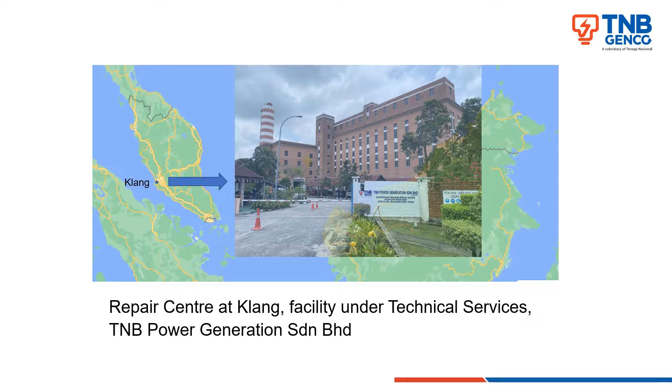Our repair center is located in Klang, a facility under Technical Services TNB Power Generation Sdn Bhd. Repair Center was established in 1994. We had a series of technical transfer agreements with GE in 1994 for refurbishment of GE stationary components, with Turbocare in 2007 for refurbishment of rotating components, and with KC Engineering in 2012 for rebabbit of bearings. At Repair Center, we have about 90 full-time staff and a 100,000 square feet facility.

In terms of general capabilities, we have gas turbine parts repair, bearing re-metalling, pump and gearbox refurbishment, reverse engineering and spare part fabrication, hydro and pump parts repair, and power plant solution provider.

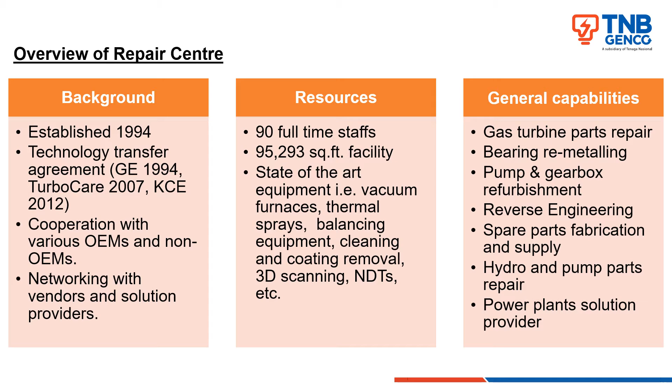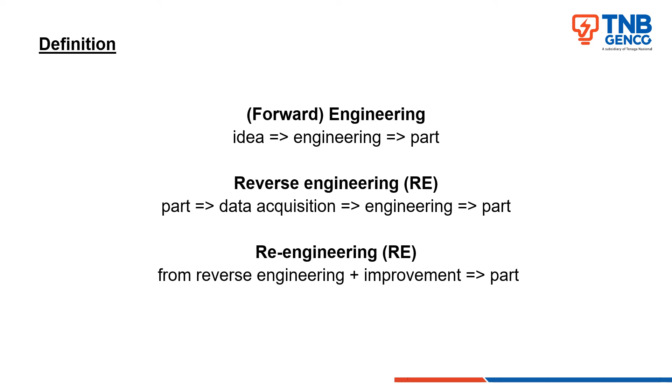Engineering, as we know, started from the idea. Then we do the engineering analysis to come up with the part. Reverse engineering, on the other hand, started with the parts. We do data acquisition and measurement on the part. Then we justify the data using engineering analysis and fabricate a new part. Re-engineering is taking a step further from the reverse engineering by doing some improvement to the part. So by re-engineering, we'll get a part better than the original.

Let's see why people in various industries do reverse engineering and re-engineering. First, there are many equipment that is already obsolete and the OEM no longer exists, but the equipment still works fine. In TNB, we have many such equipment in our older plants such as Cameron Highland. So the first reason for reverse engineering is to replace obsolete parts.

There are also occasions where OEM needs long lead time to deliver parts, but we cannot wait that long because our plant is down. For example, last year we had a broken ID fan in one of our power plants. The OEM could only deliver the replacement part in February 2021. Thus, we had to reverse engineer and fabricate the fan parts to avoid enduring losses of millions of ringgit.

The third reason is to reduce operational costs. While the cost of spare parts is only a few percent of our power generating costs, it's still in hundreds of millions every year. So it only makes sense to save 30 to 50% by doing local fabrication, as long as the part quality is at par with the original parts. For example, a small pump shaft made from low alloy steel will cost around 20,000 ringgit if bought from the OEM, but local fabrication will cost less than 10,000 ringgit.

The fourth reason is to improve the part, normally because the part keeps failing before its service interval and the OEM does not provide satisfactory support. When the part fails before a planned outage, it causes forced outage to the whole plant, and this is very expensive, costing hundreds of thousands of ringgit per day in opportunity loss. We normally improve such parts using better material, better design, or application of hard facing coating to reduce the wear rate of the part.

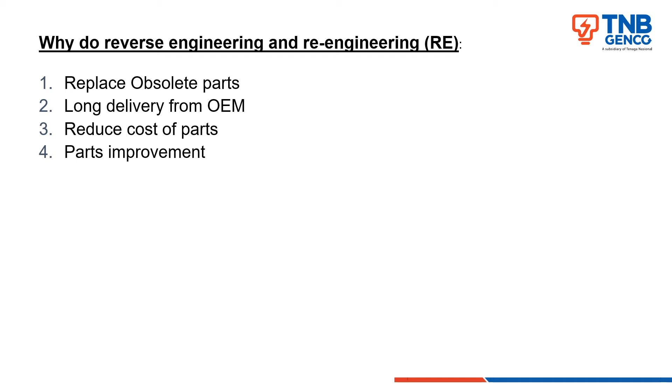Our journey in reverse engineering started about 14 years ago after TNB Remaco signed a technology transfer agreement with Turbocare, a third-party spares provider, in 2007. Unlike technology transfer with an OEM, where the OEM transfers documents and advisors to localize their processes, technology transfer by an independent spares provider is without any handing over of documents. They send an advisor and work with us to develop the processes.

One of the processes is reverse engineering, where we had to scan used or new blades, develop 3D models and drawings, and work with the dimensional data for our refurbishment process. This experience gave us the confidence level necessary to embark beyond gas turbine parts into other power plant parts.

We started with fabrication of burner spools in 2012. This is the first product where we used proper reverse engineering as we use now, which I will explain later. Then we worked on cooling water pump impeller, which required design improvement. This was the first time we had to work with stress analysis software to justify design change.

In 2014, we had the opportunity to carry out reverse engineering on the hot gas casing, a combustor part, which contained a pending patent. So we had to work with an intellectual property lawyer on how it's safe to proceed with the work, and bypass the claims in the patent to ensure that we do not infringe the OEM's patent.

This experience provided us with the knowledge, skill, and most importantly, confidence level to work with external customers. We rode on the decline of world oil price and offered our services to oil and gas industries, which are looking for operational cost optimization.

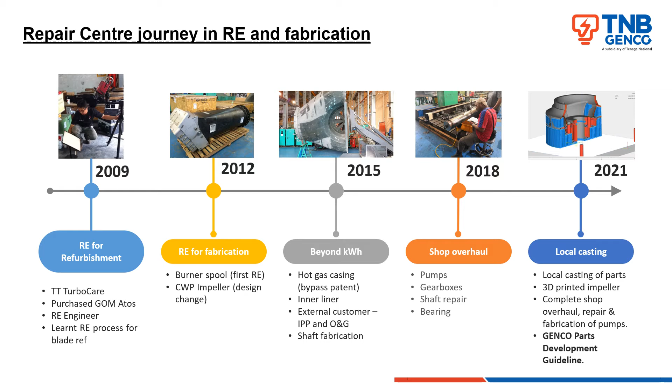This journey provided the repair center with a unique set of skills, and a part development guideline has been approved to be used in TNB Genco in August 2021.

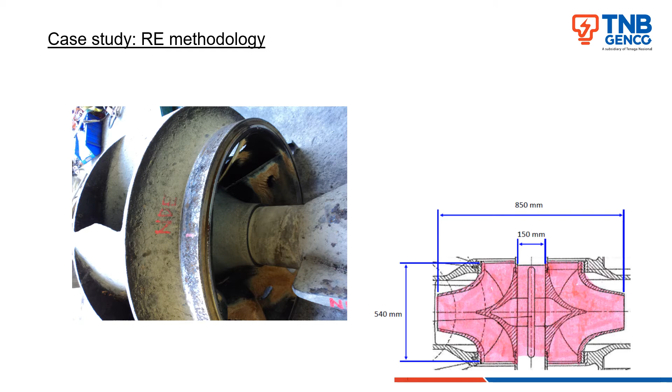This is a freshwater pump impeller. I will use this as a case study to explain reverse engineering methodology. This pump has a cavitation issue due to low suction pressure. I am at no liberty to share the brand of the pump, but I will call it company F.

The part is about 420 kilogram, and the pump comes with a 1386 kilowatt motor and rotates at 740 RPM. The medium is fresh water, and the impeller material is made from ASTM A216 WCB, which is cast steel.

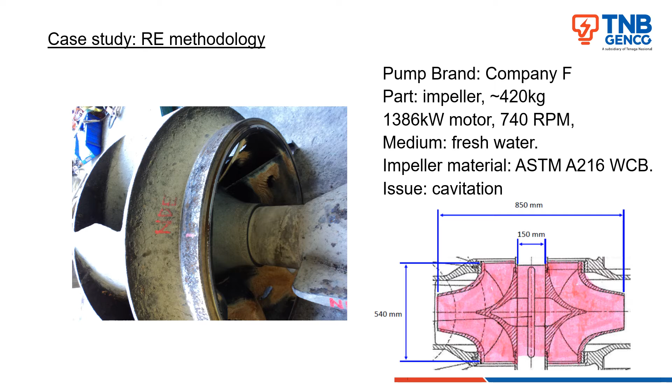In Malaysia, intellectual property is administered by Perbadanan Harta Intelek Malaysia, PHIM. We normally check for trademark, patent, copyright, and industrial design on their website, www.myipo.gov.my. The second step is to do data acquisition, which consists of design intent, material, and dimension.

The third step is to carry out analysis based on the obtained data. We'll identify design standard and material standards to be used, create a 3D model, and if needed, carry out further 3D computational analysis. The output from this step is a 2D manufacturing drawing with tolerance to be used by our fabricator.

The fourth step is fabrication. Prior to the fabrication process, we have to prepare a quality assurance plan that outlines detailed activities, methods, acceptance criteria, and responsibilities of every party in the work.

If there are many parts spread over several fabrication batches, we normally prepare first articles and check the first article thoroughly. Once the first article has been approved, then the production parts can be fabricated. During the fabrication, quality control will be done in accordance with the quality plan. All the quality control check sheets will be compiled as part of the final manufacturing data sheet to be submitted to the end user.

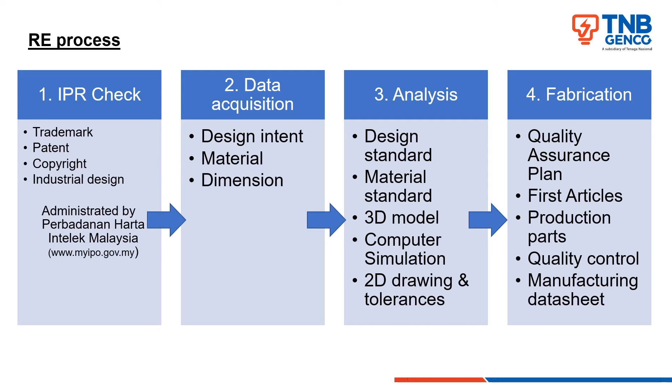Now let's see the definition of intellectual property: trademark, patent, copyright, and industrial design. Trademark is any sign capable of being represented graphically, which is capable of distinguishing goods or services of one undertaking from those of other undertakings.

Trademark is governed by the Trademark Act 2019. It provides 10 years protection and is renewable.

The second is patent. Patent is an exclusive right granted for an invention, which is a product or a process that provides in general a new way of doing something or offers a new technical solution to a problem, to exclude others from making, using, or selling the invention.

The keyword here is to exclude others, because even though the patent is published, it will prevent others from making the same thing. Patent in Malaysia is governed by the Patent Act 1983, and it provides protection for a maximum of 20 years. The third one is copyright.

Copyright is a protection given to authors, copyright owners, and performers of their copyright work and performance as prescribed under the Copyright Act 1987. It provides protection during the lifetime of the creator and 50 years after the death.

The fourth one is industrial design. It features shape, configuration, pattern, or ornaments applied to an article by any industrial process, which, in the finished article, appeal to the eye and are judged by the eye. It's governed by the Industrial Design Act 1996. It provides protection for 5 years, renewable every 5 years up to 25 years.

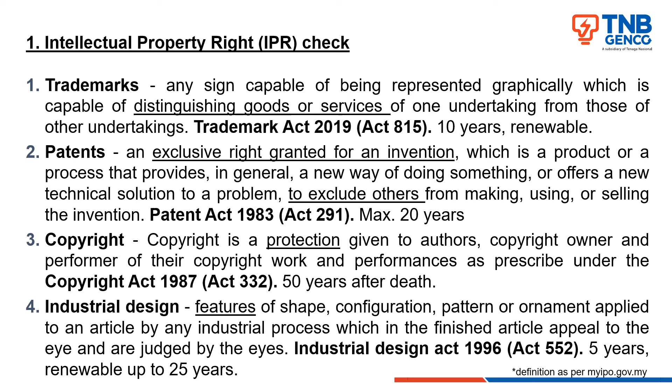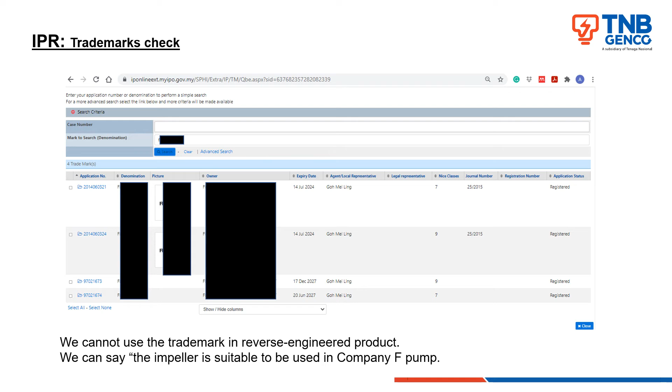Now, let's see how we use the MyIPO website to check for intellectual property. First, we check for trademarks owned by the OEM. From the result, the OEM has trademarked their name and symbol. So in our document or on the part, we cannot use a trademark to misrepresent that the impeller is of the OEM. However, we are normally allowed to say the impeller is suitable to be used for the company F pump.

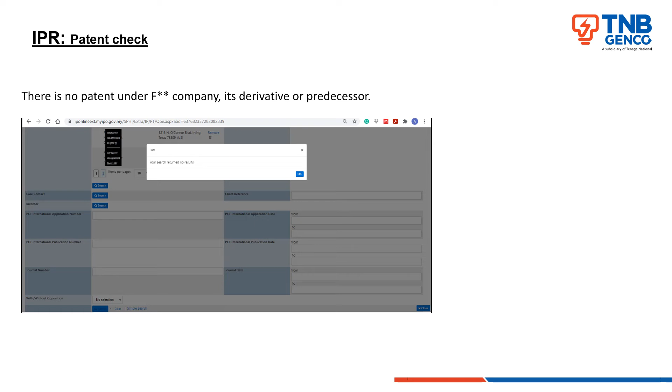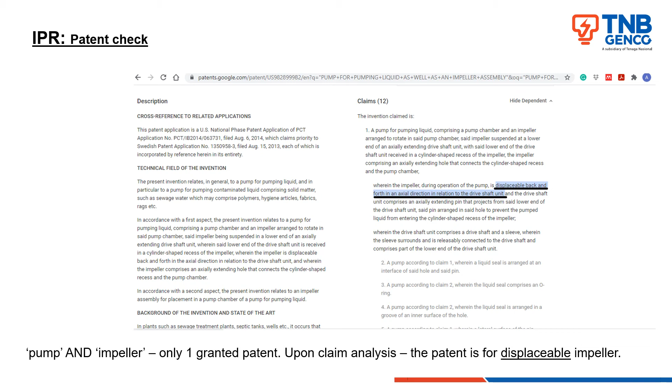Let's do a patent check. Let's examine whether company F has filed for any patent. Based on the search, company F does not file any patent in Malaysia. Now, let's broaden our search and search for pump and impeller. We found 4 files and only 1 granted patent. Now, we have to check what the patent claims. This patent claims the impeller is displaceable in axial direction. Since the impeller from company F is not displaceable in axial direction, the impeller is not bound by this patent.

On the copyright, we have checked that company F does not file for any copyright. Even if there is a copyright on drawings, reverse engineering on 3D parts is not illegal under the Copyright Act 1987. There is also no industrial design filed by company F. Based on the intellectual property right analysis, we can say that the impeller can be reverse engineered and fabricated without any legal complication. Please bear in mind that this is only an example with no critical finding.

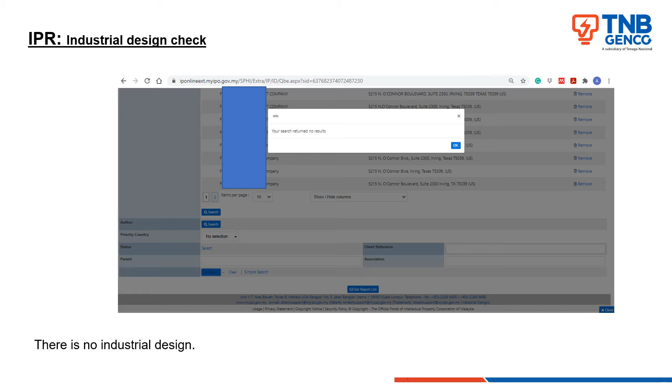If you find any granted intellectual property, you may want to engage an intellectual property law firm to work with you to ensure you will not infringe any intellectual property right of others. Remember in my previous slide, we had to bypass a pending patent in 2014. We did engage a law firm to help us circumvent the claims in the patent.

As we have cleared the IPR check, now let's talk about the second step, data acquisition. The first step of data acquisition is understanding the design intent of the impeller and the pump. We do this by collecting pump manuals and pump specs from the customer and interviewing the customer on their predicament. From this, we know that this pump is a freshwater pump with a small amount of chlorine. The pump was not correctly placed, causing not enough upstream pressure. This caused cavitation and pitting on the impeller.

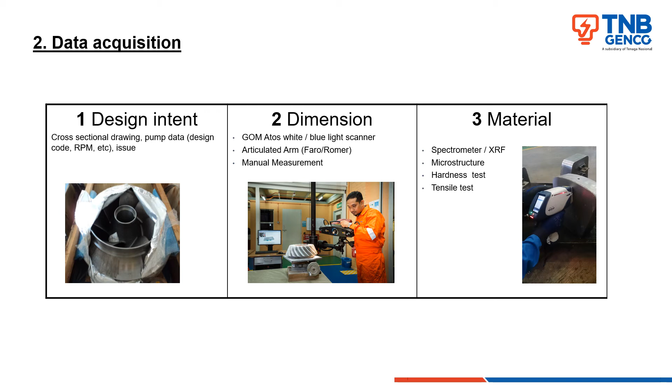As part of data collection, we do 3D scanning and manual measurement to collect dimensional information of the pump and its relative parts. Since we already know the impeller is made from ASTM A216 WCB cast steel, we did not do a material check. Otherwise, we'll use XRF to determine the chemical composition of the material. For material that is affected by heat treatment, such as low alloy steel, we'll also carry out hardness tests or tensile tests to determine the heat treatment condition of the part from the material standard.

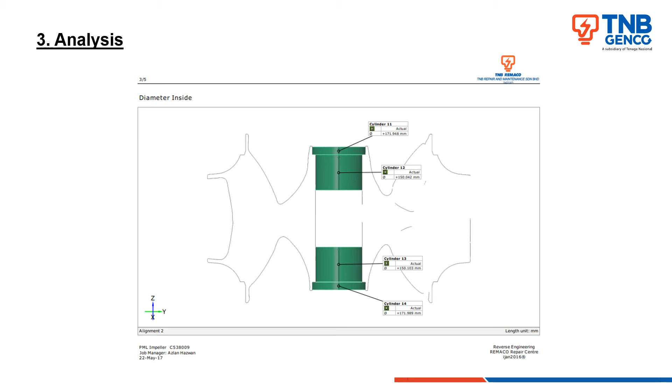Now we get to the third stage of reverse engineering and fabrication processes, engineering analysis. Since we already know the material, we don't have to carry out any detailed analysis on the material, and we focus on the dimension. Based on our scan data, we carry out measurement and decide the tolerances for the fitting area. Then we prepare a 3D model and compare the 3D model with our scan data. We'll make the deviation between the 3D model and our scan data as little as possible.

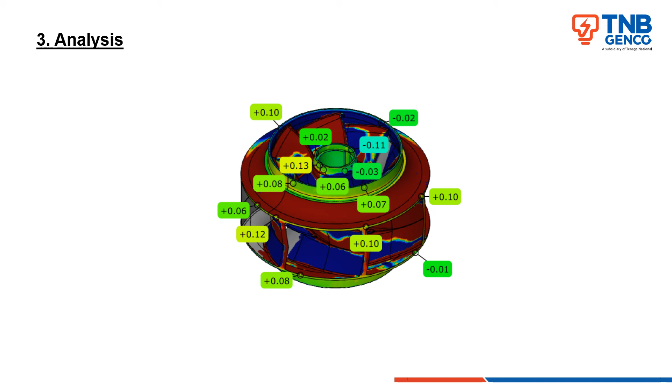Once we are satisfied with our 3D model, we'll create a 2D manufacturing drawing. In this 2D manufacturing drawing, we'll put tolerances for the fitting area so that it can be machined correctly by our fabricator. In a normal case, we can start fabrication with the 3D model and 2D manufacturing drawing.

However, in this case, the customer has a problem with pitting due to cavitation issues. Therefore, we propose for the material to be upgraded to a harder material to prolong the life of the impeller. We propose the material to be upgraded to CA6NM, a martensitic stainless steel. In this comparison, we can see that the upgraded material has higher strength and is harder than the original cast steel. In addition, the material is also slightly lighter. For pumps, it's normally a concern if the impeller is heavier by more than 10%, but not a problem when the impeller is lighter.

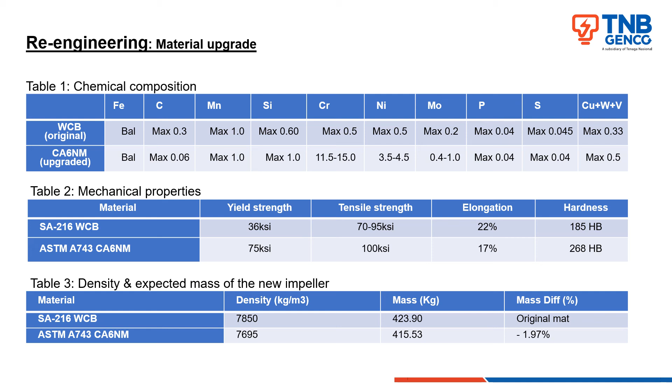In the case study for the freshwater pump impeller, we do not make any design change. But here I would like to share with you a re-engineering process to make some improvement on the impeller. In this case, a power plant had their cooling water pump impeller broken at the roots of the blades.

Based on the stress analysis of the original design, we found it has high stress on the root. Thus, after discussion with the foundry, we decided to add more material to stiffen the root. The stress analysis shows that the stress at the root after the modification has reduced significantly. But adding material caused the impeller to be heavier by 10%, but this is still acceptable to the end user.

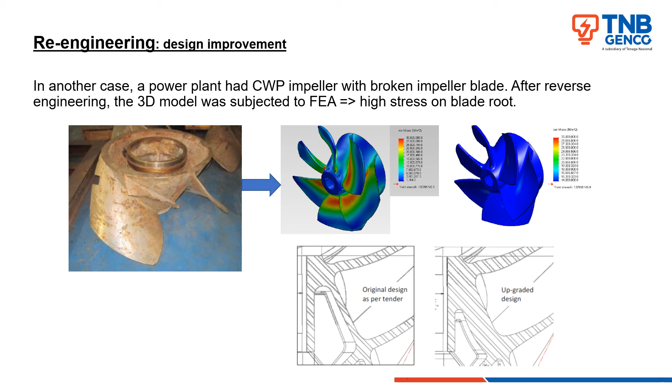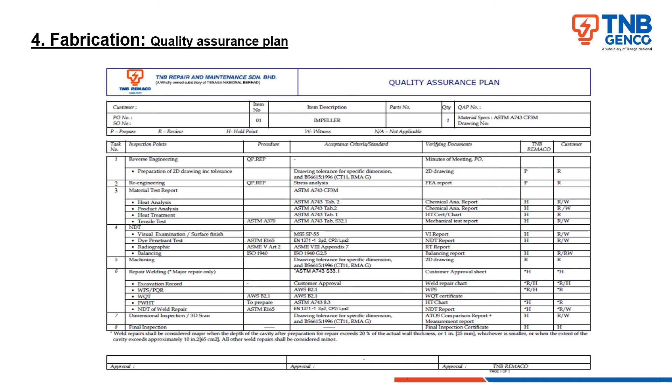Once we have done all the engineering analysis, we are ready to move into fabrication processes. But before fabrication can start, we have to prepare a quality assurance plan. In this plan, there are columns for activities, procedures, acceptance criteria, verifying documents, and responsibility.

If we have only one piece to fabricate, then we proceed with the production parts. The fabrication process starts with wooden pattern preparation, which will take several weeks. Then the foundry prepares a sand mold using the wooden pattern. The foundry will melt raw material and check with a spectrometer to verify chemical composition. Once the chemical composition is within a designated range, they will pour the molten metal into the sand mold of the impeller and separate molds for specimens.

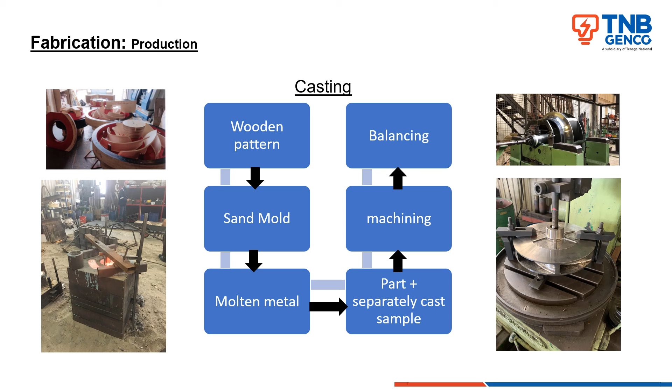After cleaning of the casted parts, we'll do machining, NDT, and balancing on the impeller. At the same time, we'll also do tensile tests on separately cast specimens to record the tensile strength of the casting.

If there are many parts, we normally prepare a first article. It could be one piece or several pieces. The fabrication process and quality control should be similar to the production, except that we do destructive testing on the first article. This is an example of fabrication of 24 pieces of ID fan blade.

If the part passes the destructive and non-destructive tests, we will freeze the process and proceed with production of the parts. The first article validation is there to ensure that we do not make any mistake which will be repeated in all batches. If there is any mistake, it will cost money to redo all the processes and we waste a lot of time and resources.

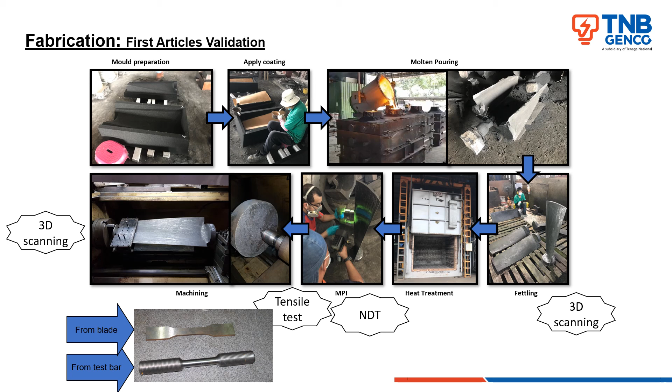I also would like to share two of our future initiatives. The first one is to have product data management software. Currently, we are operating manually, where data is kept in a local server and document review is done manually through discussion, email, and WhatsApp. We have faced data loss numerous times due to hard disk failure. In addition, document review is not properly recorded and drawing revision is done manually.

In addition, as we also have staff moving out to another department, some critical data is not properly handed over. As we have accumulated more than 5 years of data, the data has become unmanageable if we keep doing it manually. PDM will provide a structured reverse engineering and fabrication workflow and no longer depend on individuals. PDM also provides security and safety of our data.

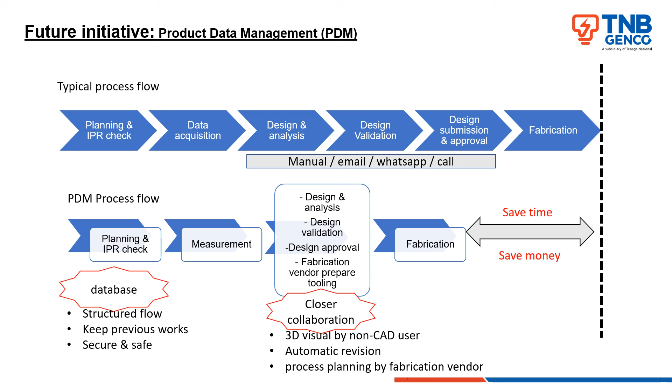In addition, with closer and trackable collaboration, we expect the use of PDM will save time during design analysis and eventually money. After some due diligence, and since we are primarily using SolidWorks modeling software, we plan to have SolidWorks PDM by the end of this year.

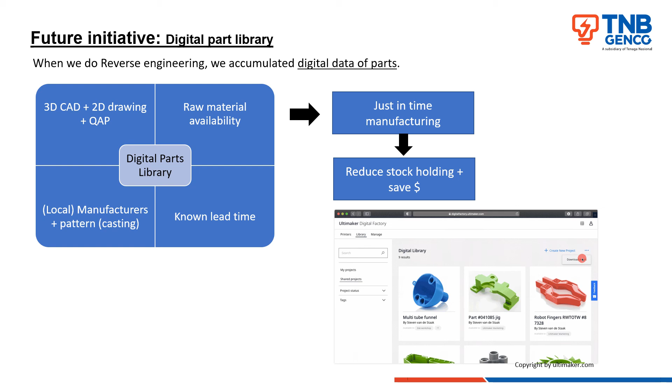This PDM will also act as a basis for our second initiative, Digital Part Library. The idea is, as we have done many reverse engineering and fabrication jobs, some of the parts could be ordered again. The digital library will have all the information needed to fabricate the part within the allocated time. We're hoping this initiative will reduce stock holding level in the TNB store and ultimately save money for TNB.

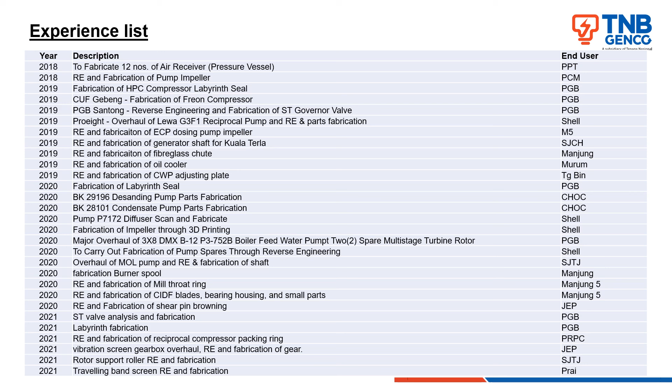These are our experiences in reverse engineering and fabrication for the last 3 years. As you can see, our experience is varied across various equipment in power and industrial plants. Our customers are not only TNB but also other IPPs and oil and gas companies. I hope with this sharing, we'll be able to learn from each other. There are many aspects in reverse engineering and fabrication that we can improve further, and I'm hoping for your feedback.